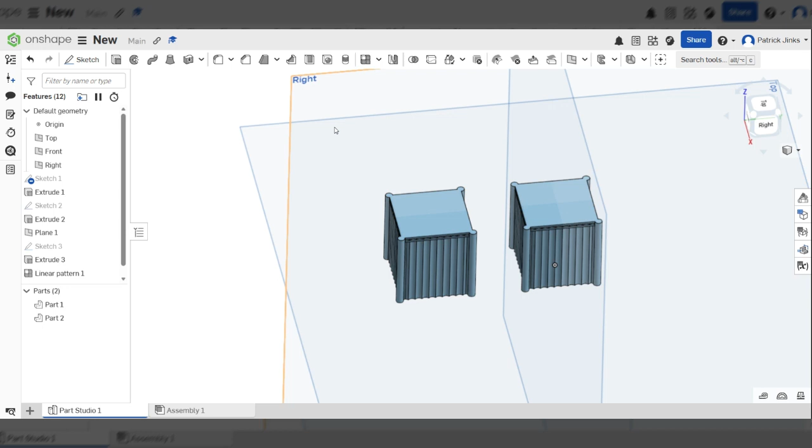Today we're going to be looking at how to make Big Ben on Onshape. It's not going to be a photorealistic model, but we are going to try and put as much detail in as we realistically can. This should be perfect if you want to 3D print it or if you just want to show off and render it. This should be perfectly adequate for that.

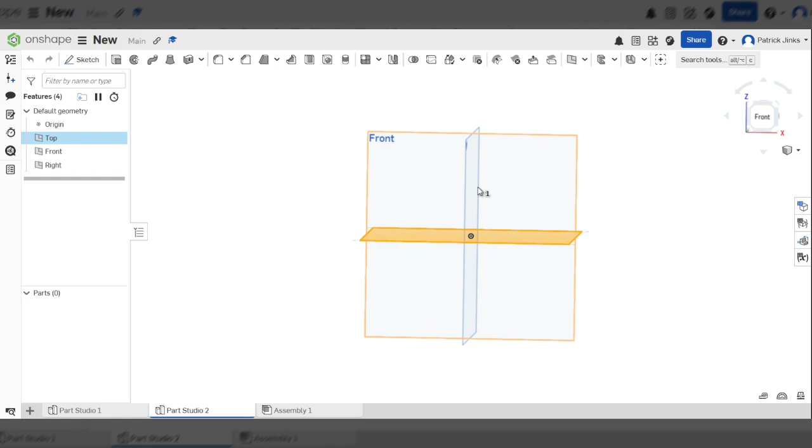So first thing you're going to do is jump into a new part studio. And for the purposes of this video, we're going to be doing a 700 scale. So that means that the base of Big Ben is going to be about 2 centimeters long and wide, and the height is going to be about 25 centimeters in total.

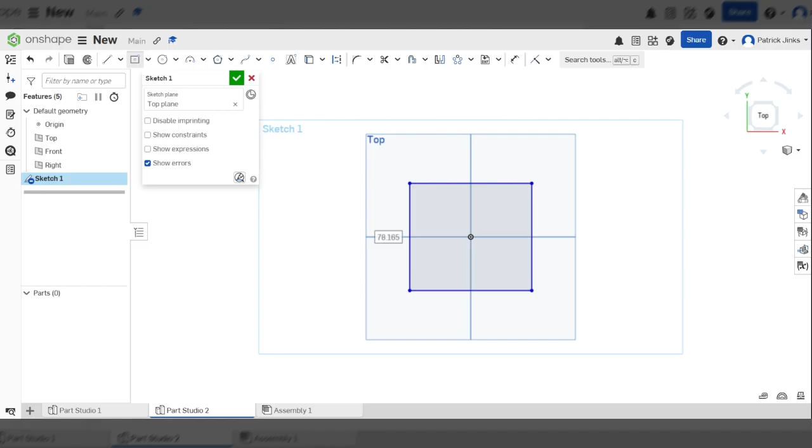So the first thing you can do is a sketch. If you want to do a different scale, feel free to play about with these, but remember you'll have to scale up every dimension that I give you. First I'm going to sketch on the top plane and draw a center point rectangle from the middle there, making sure the base length is 20 millimeters, and the height again is 20 millimeters. So you should have something like this.

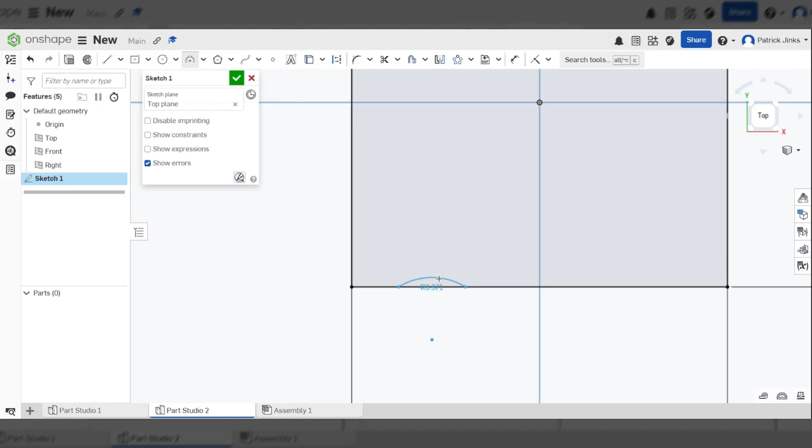Next, before I confirm that sketch, I'm going to draw a 3-point arc. That's this tool here, shortcut A. Somewhere along the base, I'm just going to draw a short arc. It doesn't really matter how wide or deep it is. I tend to recommend not going the full half circle, but maybe about a quarter. Something like that should be adequate. Then I'm going to set the distance between each of these points as 1.9, and you should have something like that.

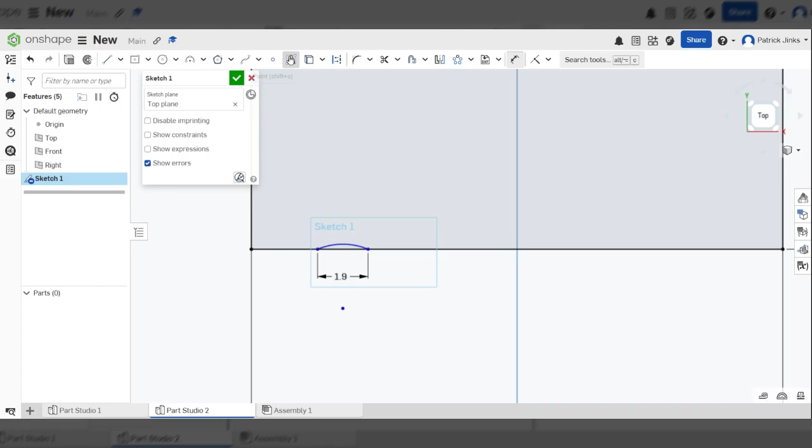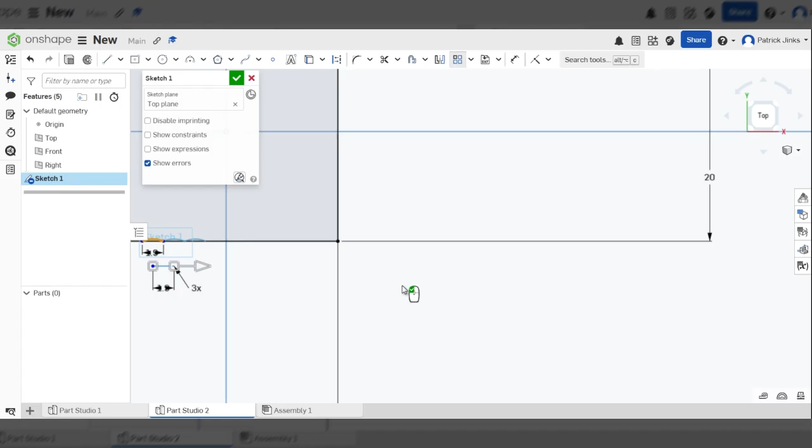Next, this is where our skills start cranking up - we're going to do a linear pattern tool in our sketch. Jump up to the sketch toolbar. You might see the circular pattern tool as the default. Click the dropdown, click linear pattern, then click on this arc here. If we zoom out, it defaults to putting 3 of these arcs at 25 mil intervals. We're going to change that 25 to 1.9, and you'll see these points, because it's the same distance as the arc, line up exactly continuous with each other. We're going to change that 3x to a 10.

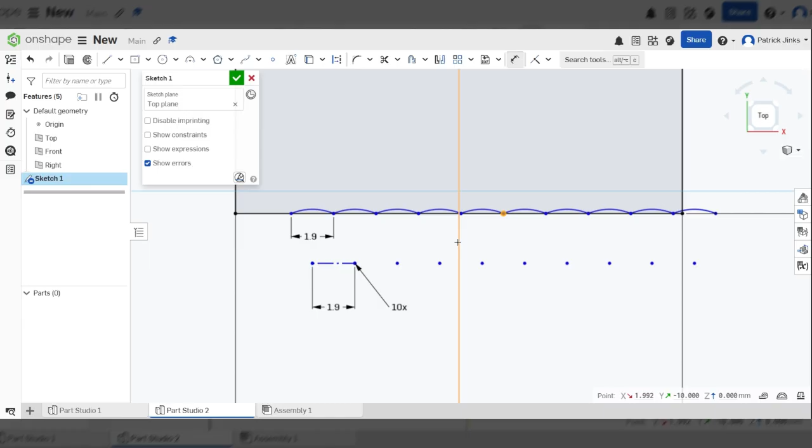Now click away from that to confirm the sketch. The only thing left to do with these arcs is get them directly in the middle of this side. So I'm going to count 1, 2, 3, 4, 5 - that's this point here. I'm going to set the dimension from this point to the center, this middle plane - this is why we did a center point rectangle, so I've got this middle plane. I'm going to set that distance to 0, and that should scoot everything back a bit and make sure everything's centralized.

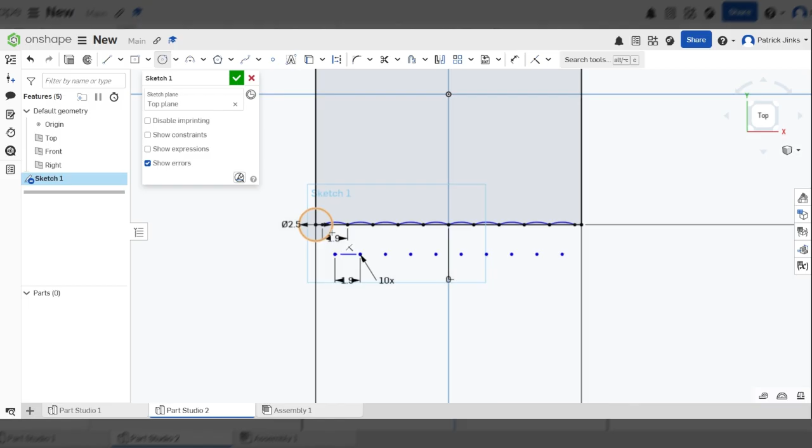Last thing to do is grab my center circle, and on one of the corners, draw a circle between 2 and 2.5. I did 2 earlier for the example - I might do 2.5 now because 2 was a little bit small. It's going to be up to you; you're not going to notice the difference between those.

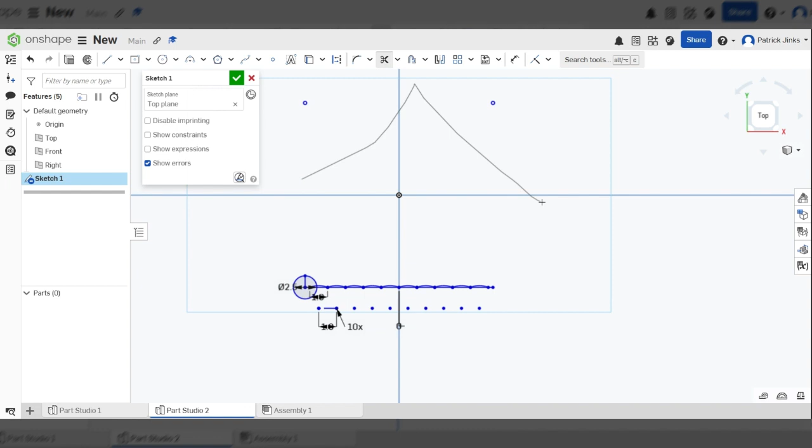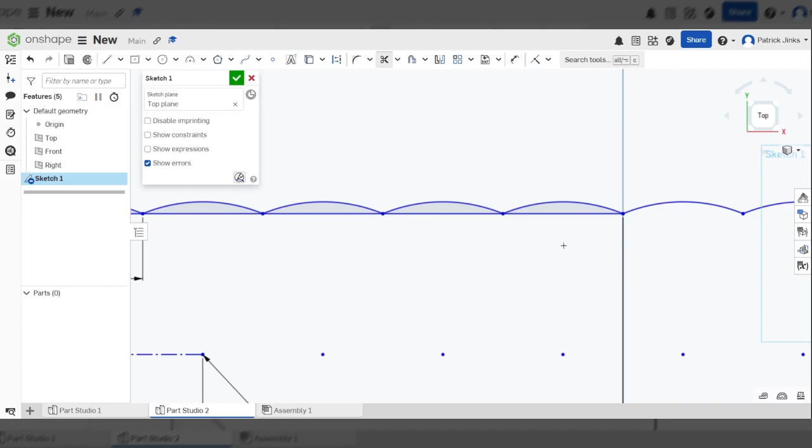Okay, now I'm at a stage where I can start. I've got my framework, so I'm going to start deleting some lines using the trim tool - I'll show you why in a minute. I'm going to get rid of the 3 big lines, and this small extension of a line over here. Then, super carefully, make sure not to delete the arcs themselves. It's probably easiest to click and drag on these lines to get this intersecting line, and just scooch and intersect each line I want to get rid of. If you make a mistake, just click Control Z and it'll put you back, and you'll need to repeat the step more carefully. Inside the circle, I'm going to delete everything.

Okay, so I'm left with one circle at the side, and then the remainder of this arc, and then 9 other arcs that go along.

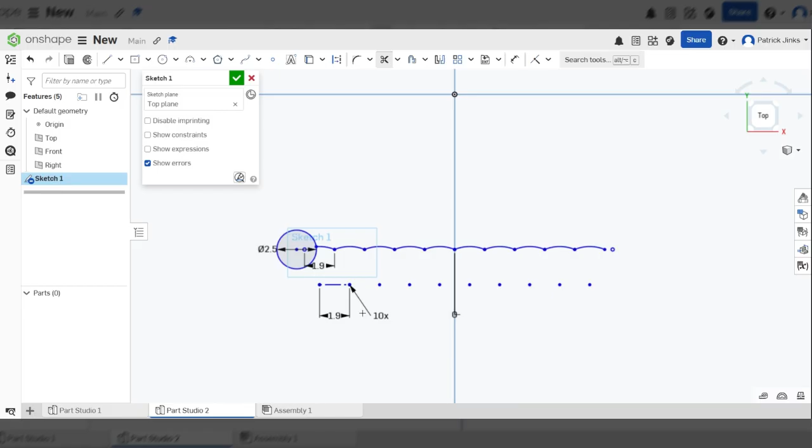Okay, what you can do now is, we did our linear pattern tool a minute ago, we're going to click the drop down, and we're going to click circular pattern. What I'm going to do is highlight everything, and you'll see when it's a circular pattern, it defaults to putting the origin of that pattern around the origin of your screen, which is exactly what I want, like that.

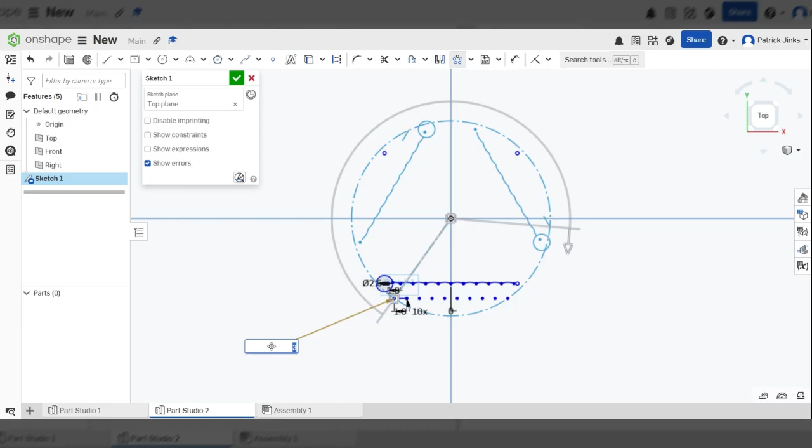And it looks a bit weird because it defaults to 3, you'll see it says 3 times at the bottom here. If you double click on that 3 and type 4, you'll see it bounces to a square, and we're starting to see where this Big Ben shape is taking form.

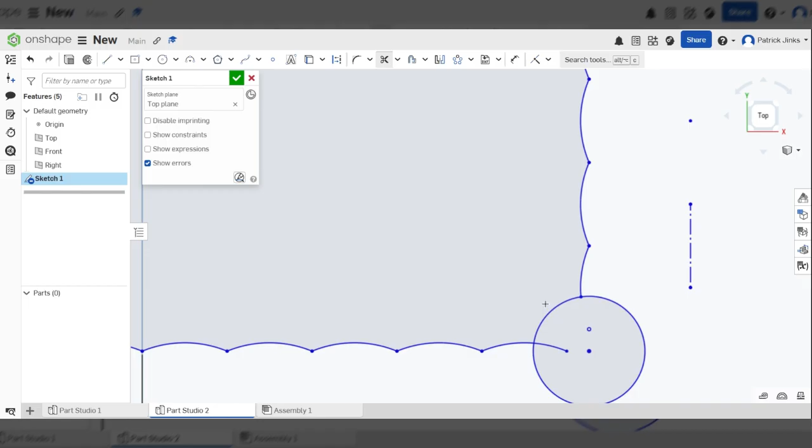So just click enter, click when you see that green tick on the cursor, just click away from the shape. What we need to do now is grab our trim tool once more and get rid of this little arc here and this segment here so that we're left with one closed shape. And if we do that on all four corners, you'll see that we've got one solid area that is all confined by the shape that we made.

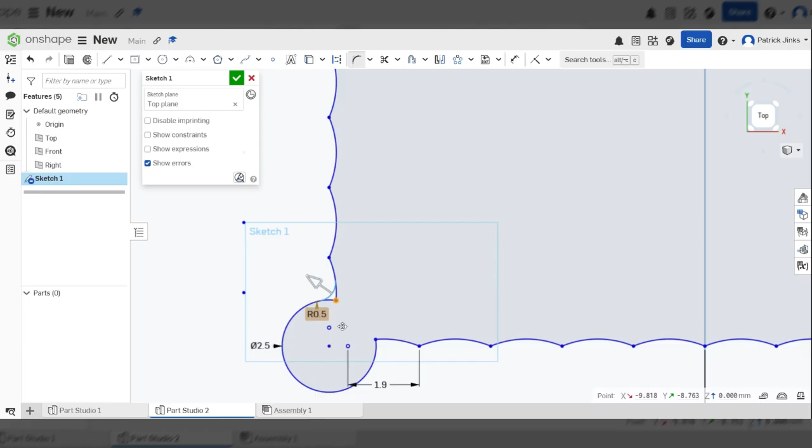What I would do now is go around and put a little fillet on these corners, just smoothing it out a bit. 0.5 should be fine, depending on the size of your elements - I'll let you decide, you might go to 1, but for me I think 0.5 is going to be perfectly adequate.

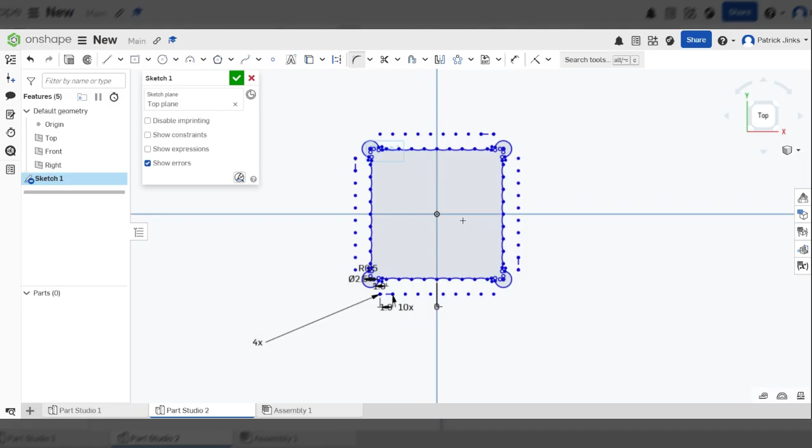And now I'm going to extrude it. Now I'm just going to jump onto the one I did earlier because I can't remember how much we extruded it by.

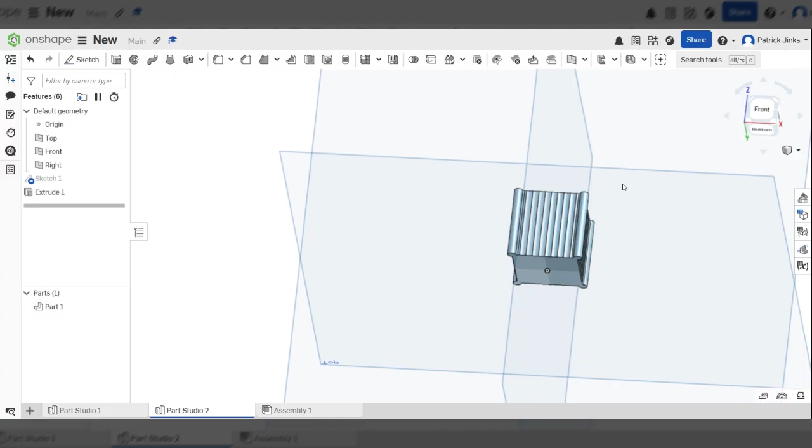22. So yours now, you've got one single closed shape, you're going to extrude that. It's going to default to 25, so dial that down to 22. Grab the tick, and you'll see we're already getting something like the base or the column of Big Ben.

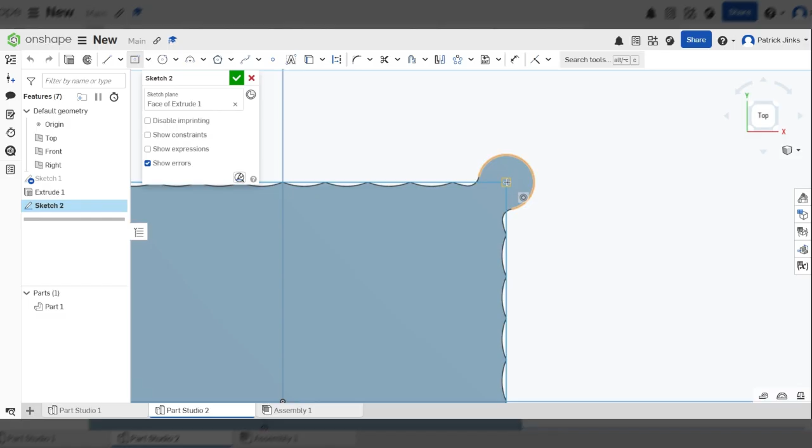Okay, next what I'm going to do is, on this top section I've done, I'm going to press N to orient myself to the plane, and I'm going to make a sketch on that new top plane. Again, I'm going to draw a center point rectangle, and this should snap to the center point of these circles here, and you'll see that brings me exactly in line with these top points, these nodes, these points of my arcs that I drew to start with.

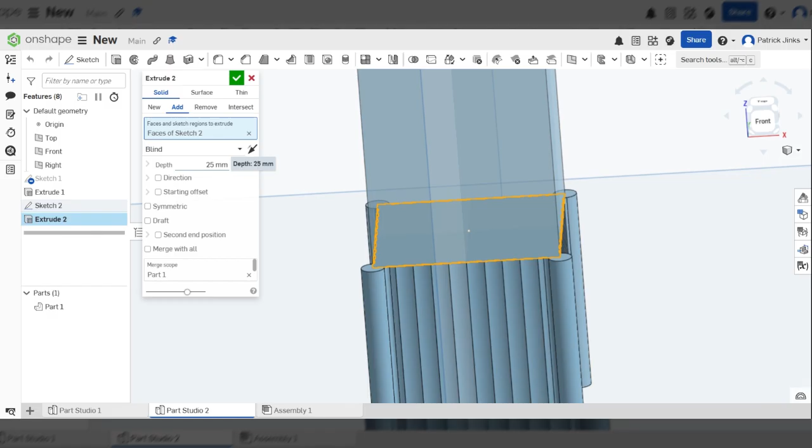So just hover over and it should snap to the center of one of those circles, and that should be a perfect square. What I'm going to do is extrude it by 0.5 mil or 1 mil. You might get away with 1 mil, but I think for photorealistic purposes, 0.5 might be better.

And the only thing I'm going to do now is, you can see that's trying to extrude up, I'm just going to flick the arrow so it extrudes down. Click the tick. So I've got a little square there.

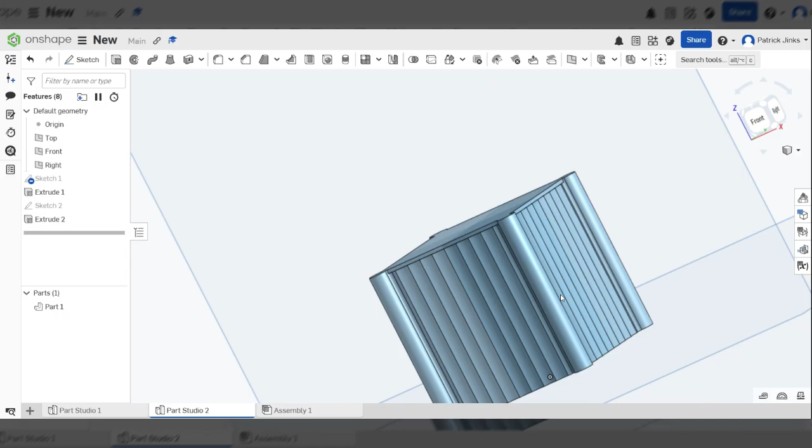Okay, next thing, I'm going to zoom in to this flat section underneath one of these arcs, so you can just see the underside of this square I've made visible. I'm going to click on that.

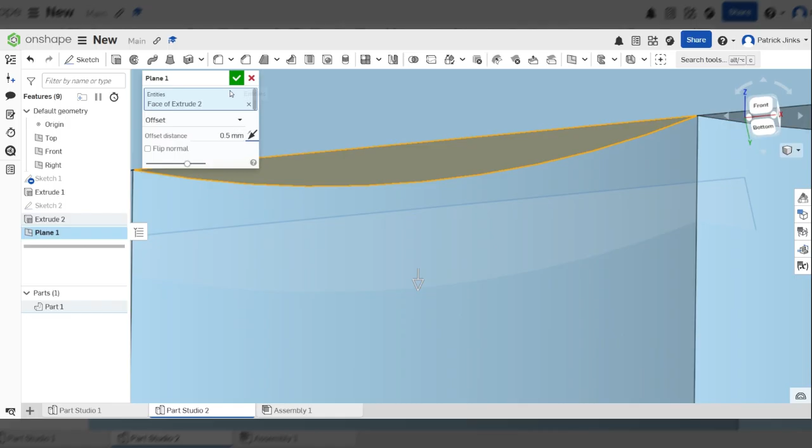I'm going to click on my plane tool. I'm going to offset a new plane by 0.5 mil. And you will see that that plane appears right underneath. Now, it might be quite tricky to click on this plane because it'll appear quite small.

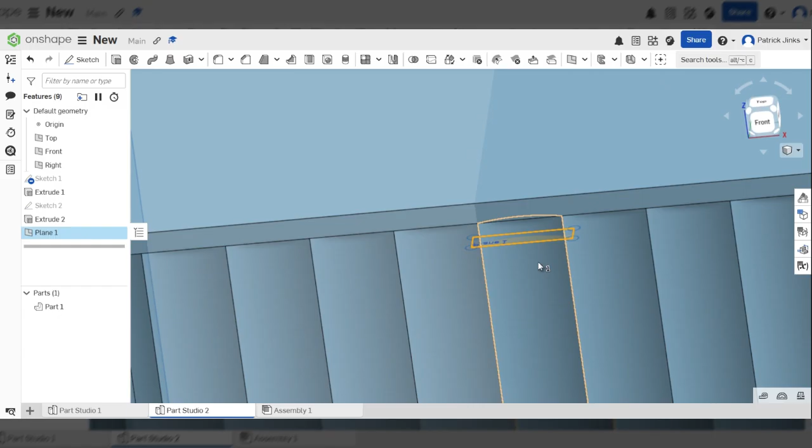If you find that's the case, just click on the plane tool here in your left-hand toolbar - I've clicked on the front plane, let's just deselect everything. Plane 1, you'll see that highlights, and I'm going to make a sketch on there.

Now, this is a dead easy move. All I'm going to do is select my project tool, that's this box here. This is to save me drawing out something again.

If I just hover over my current top face, you'll see it highlights yellow. We actually get a projection of that face in light blue appearing on my new plane, so I don't have to redraw anything. I just need to grab that shape and it projects it down.

I'm going to extrude that by another 0.5 mil, and make sure that is extruding downwards as well. So what we've got here is a square that's 0.5 mil, a gap of 0.5 mil, and then another square of 0.5 mil. I'm going to click tick.

And there we go. Right, okay. That's pretty much all the detail we're going to add to the tower or the column of Big Ben at the minute.